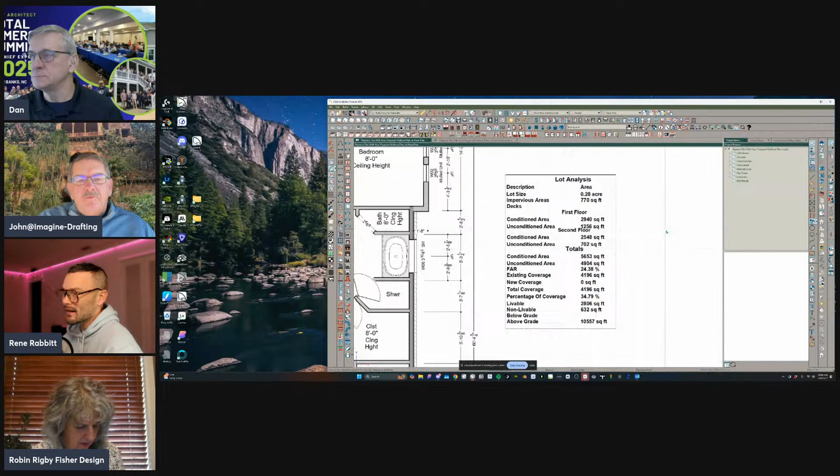There we go. It should work just like this. You just start drawing and it produces this area analysis for you. So if I did a new plan and just drew out some walls, there's a few little cool tips and tricks for this, which is that it's meant to recognize any room type that has the word 'addition' in it. So if you're doing a remodel, this works particularly well.

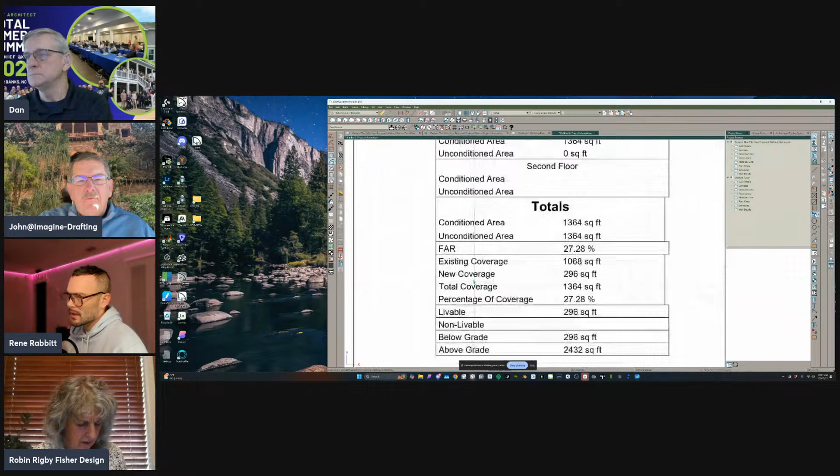Notice I put that as addition, and then wherever you're going to store the set of schedules that comes with this—in my case it's in a project information section—it's going to pick up that there's some kind of new coverage there from that addition. It gives you total coverage, gives you conditioned area, unconditioned area on a floor by floor basis.

You can format this for acres or square foot, for lot size. It even gives you a way to do impervious areas that's either driven from rooms automatically or from a polyline. And I have a pretty robust set of instructions for this too.

I actually took the time to write up instructions for once, which almost never happens. How to use it? I know, it's incredible. What a concept. But yeah, I know.

Here it is, the area analysis package. And when you click on it, I even give you an example download in case you want to just take a look at the install instructions and see if it's something that you think you can do.

Or you could pay me to install it for you. It actually comes—that's not true, I said it comes complimentary with install. I will install it for you. So I even give you a schedule link for installing it.

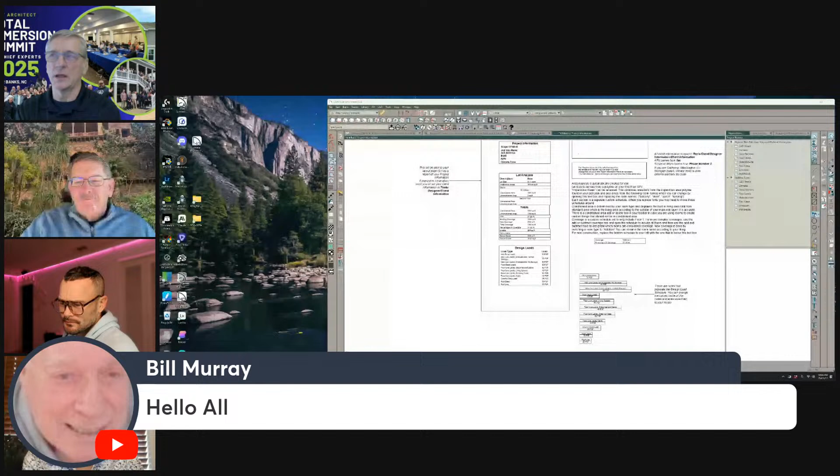So yeah, if you're trying to do automatic area analysis, go pick that up. Rene, you never cease to amaze. Nice job. So I'm sure you'll talk a lot about that at the summit, which is coming up. Chad's impressed. Ready for it, better go get it.

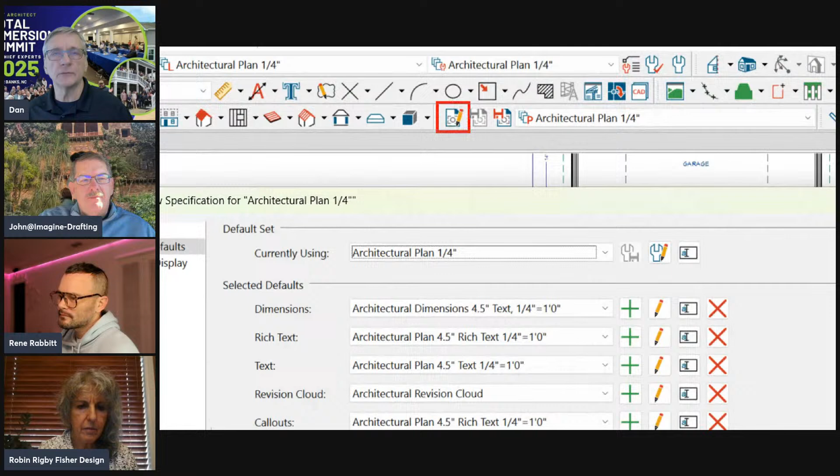So when I click on this little icon with the pencil on it, the edit the view icon, it's already named because I've named it with the plan view. I could change that name right now if I wanted to, but I'm going to leave that alone. And here's all the things associated with this view.

When I open the dialog for this kind of view, it's going to be different than when I open a dialog for a 3D view. So let's do that real quick - let's open up a dialog for a 3D view. Bring up an overview - all right, there it is. Now let's click that same icon.

You get a few different icons, some different things here now. So one of the things you want to get used to doing, and I do a lot of 3D views on my screen, on my plans, my finished plans - I do it.

Of course, you're going to do elevations, cross sections, schedules, area schedules, that kind of stuff.

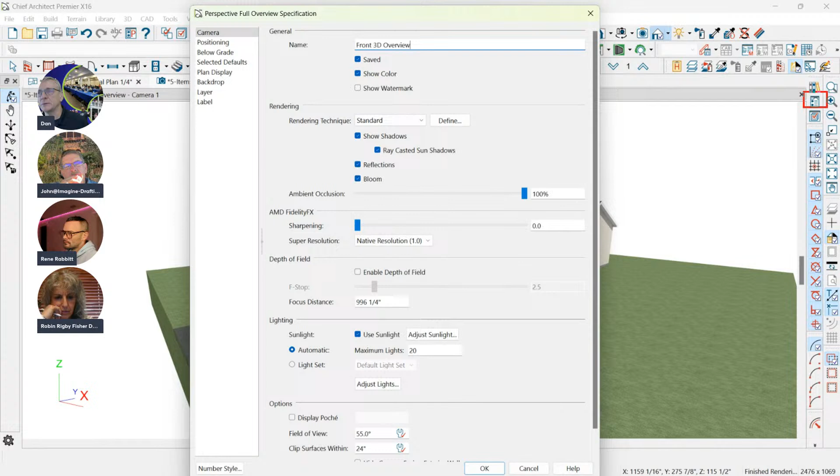So the first thing you want to do is name this. I'm just going to call this a front 3D overview. The reason I want to do this is because I want to be able to use my project browser to manage all these views I'm going to create. So I'm in a front 3D overview.

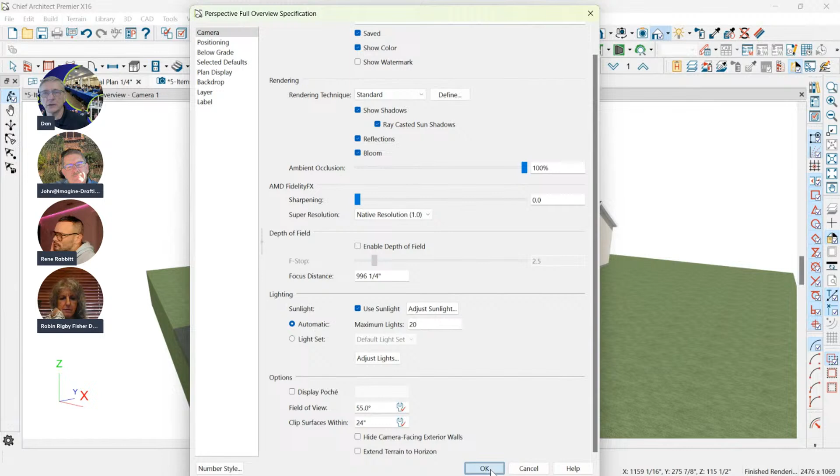Now I could go through and start editing some of these things. I could change the position of the camera, what shows up below grade, all of those different elements, change the camera style to physically based, whatever style you want to see this view in.

So you have all these functions that you could do with this particular view. All right, so that's cool, we could do all that. So there's my front view. I just changed it again - I clicked this icon and then I moved my camera. So now it's different than what I first started with. I need to be aware of that and then click this icon to save the new setting. So this new view is now locked in place here.

The other thing you use this icon for right now is to create different views without having to go back to the floor plan and drop a new camera. So I'm going to save this view, and Chief will automatically rename it something else, like overview 1, 2, 3, 4. You can change the whole name if you want to.

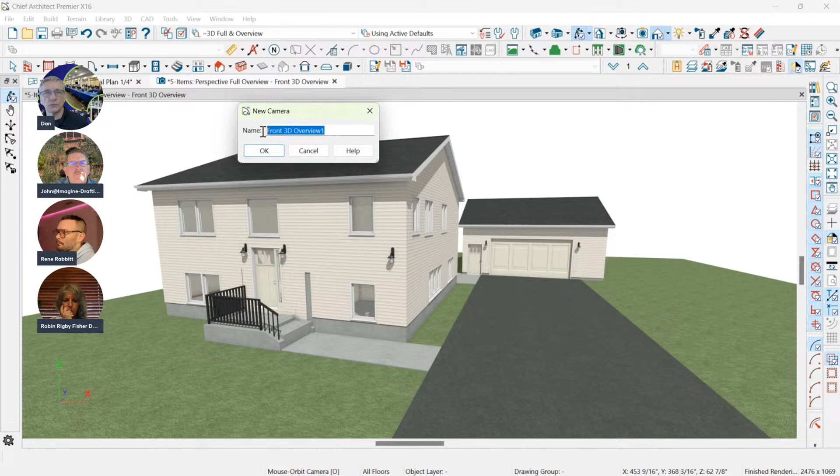Now I could go ahead and rotate this, and maybe I should have named it side view - I could go back to do that later, but let's save it. In fact, I could go to my browser right now and go to my floor, my cameras, overviews. There's front overview 1.

I'm going to rename this one right now, side overview - I'll call it my right side. It's just project, just keeping track of the things that you're adding in your plan all the time. Each time you create a new view, save it with the proper name and you're good to go.

Okay, so let's say I've made some changes here, I've rotated a little bit. Okay, I'm going to save that. Done. Now I'm going to make another copy of it - I'll call it my back view 3D overview. And yeah, good enough, and click OK.

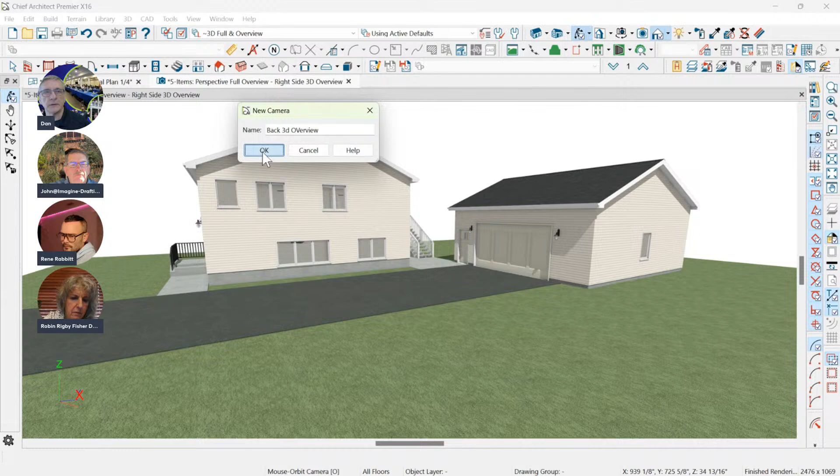Now I've got a new camera. I could rotate it like this, save the new position. I've just created 3 new views that I could put on my layout at any time. So on your layout, all you have to do is click on any viewport, copy a viewport if you need to, and then open the dialog for that viewport and change it to the listing that you have on here. And that's what will show up in that viewport.

Don, will you show which icon you use again to create it first? So once you open the screen up, where do you see it? So again, I'm in this view.

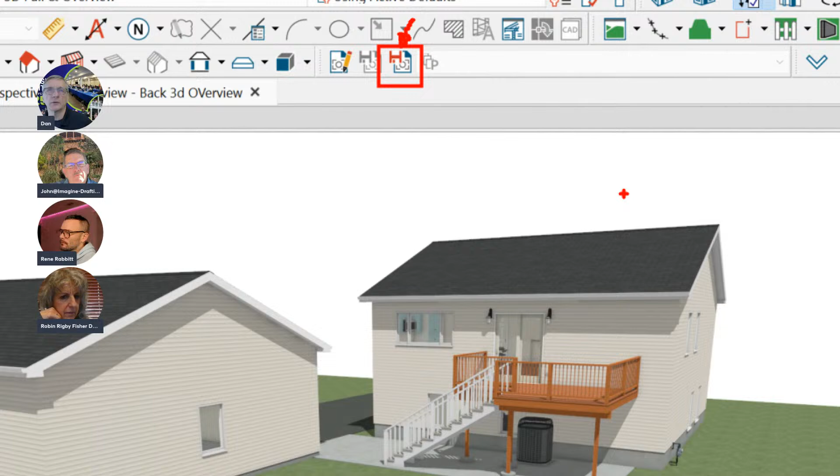If you notice, this icon's grayed out - okay, so that means this view is up to date and saved. Okay, so rotate your camera again. But to make a new one, I'm going to click the last icon here with a little diskette on it, for those of us old enough to remember what a diskette is. That's the save, create a copy of this view.

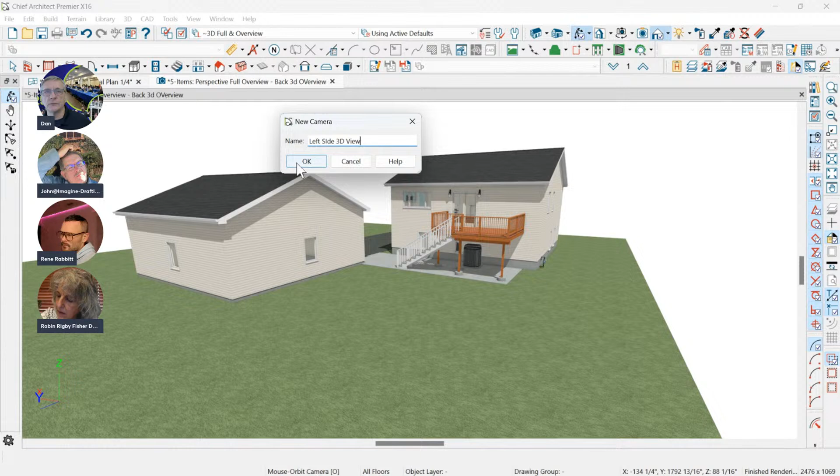All right, so I'm going to call this my left side 3D view. It's really nice to get used to naming all your views as you're creating them. If you're just opening a camera and closing it, don't worry about that. But if you're creating views that you're going to use on the final plan, name them so you can go back to them at any time.

And name them what you want them to say on your viewport on the layout, because you can use that automatic label - that's going to be your label for the view on the layout. So I moved this, now this icon is not grayed out, so now I have to click save. Done - I've just created 4 views. I could close this view now, go to my layout, and switch to any view here.

I created a new plan, not new layout. Let's go new layout, new layout. And I'll switch to a different page size.

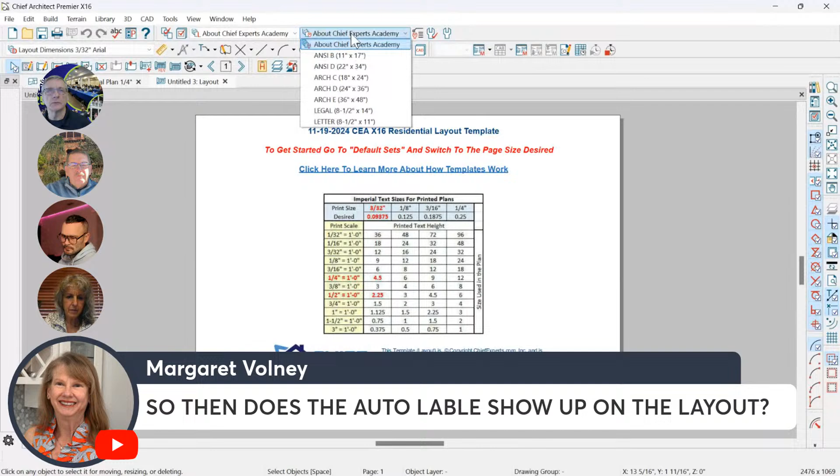Let's throw a viewport on here. I'll just throw my floor plan on there. I'll send that to the layout. Click OK. There's my floor plan, there's my viewport. I'll make that viewport smaller.

Okay, I can crop over that. Let's say, okay, I want to keep that view. And I'm going to create another view.

So I'm going to just copy, pull that view off, open its dialog, go to my linked view, relink it to something else. In this case, I'm going to go link it to my plan, my cameras, my overviews.

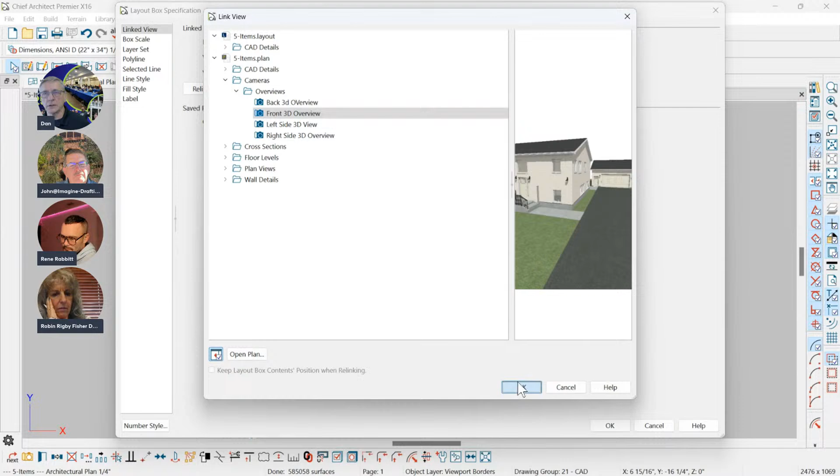There's those 4 views I just created. And when you click on them, it'll show the view right here. Click OK. Let's see, I'll do my front view there. Click OK. Click OK again.

It's going to populate that. A lot of times you got to click the refresh button, this little button down here to refresh the viewport. And then your view will show up.

If it's a camera, you have to do that. I don't know why they make us do that. It's a pain in the butt.

And then they need to adjust that in the viewport, or the, what do you guys call it, the view box or something? Layout box. Yeah, I still call it viewport.

And then I can resize that to be whatever I want. So I might have to go into the camera, reopen it, it's linked to that camera now. Now I could go in here, do it, save it, close it, refresh the view.

And Don, will you scroll in to show where the label shows up so that way Margaret can see that? And then you can turn that on.

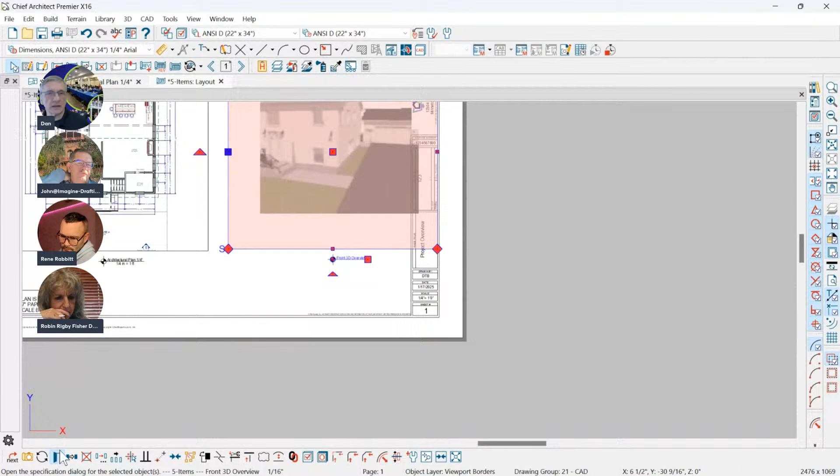Margaret, you emailed yesterday. So all you have to do with any of your viewports, any of your layout boxes, is click on it, open its dialog, choose what kind of label you want from the label. I'm going to use marker or callout.

So for your elevations and things like that, where you have a callout on the floor plan, this is view A, B, C, D, you want to use a callout. If it's a floor plan, use a marker.

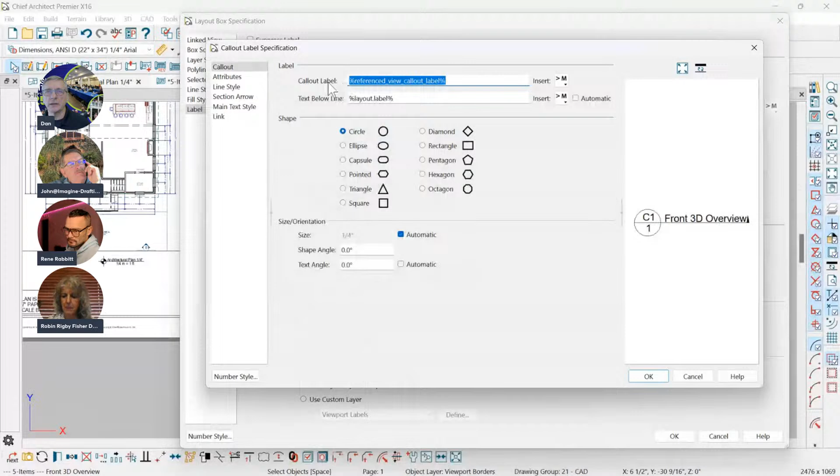So if we're going to use a callout, I'm going to go edit. I'm going to callout label. That's what I named this view. See, it says front 3D overview.

A lot of times you don't, that's the page number there. I'm going to get rid of that. I don't need that on this view. I just need the layout label.

Attributes, you can change the size, the spacing, section arrow, turn that off, click OK. If you want to have the scale under there, that would be part of an attribute, so you're going to put box scale. This is not a box scaled box, so I'm not going to do that.

And you're done. So that's your label. Nice. And then if I move this to page 2, so let's say I copy that and I go to page 2 and paste it.

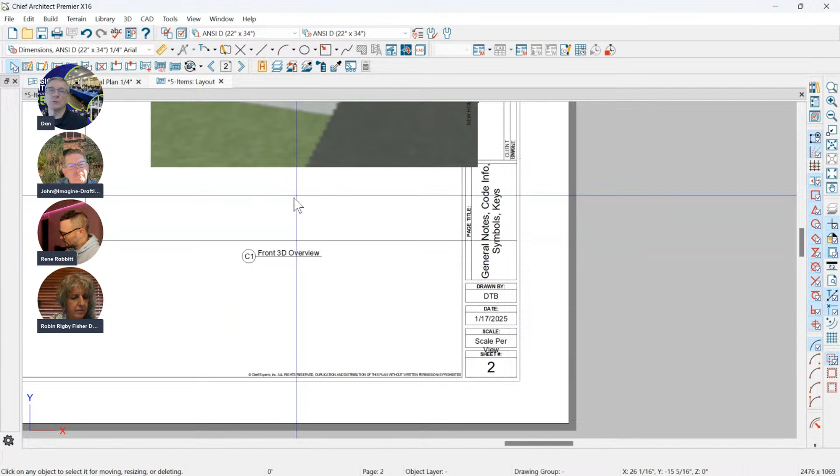Notice it won't put the 2 under there. If it's a floor plan or if it's a view that you have the 2 items, the top and bottom with the page number, it'll change this automatically. However, back on my floor plan, if I changed that view to something else, that label would update automatically.

So I hope that helps, Margaret.

You went way too fast. Let me finish my 5 points and we'll do it again. All right, I know. Actually, can I show something real quick, Dan? Yeah, go ahead. This is right on line with what you were just doing.

When we're making new camera views, and this comes up a lot in the Facebook groups, let's just say I've got, I'm going to turn on some electrical here. Say I've got electrical in one room, electrical in another room, and I only want to make sure all my lights are turned on for the room that my camera is in. So let's say I've got a camera now in this room.

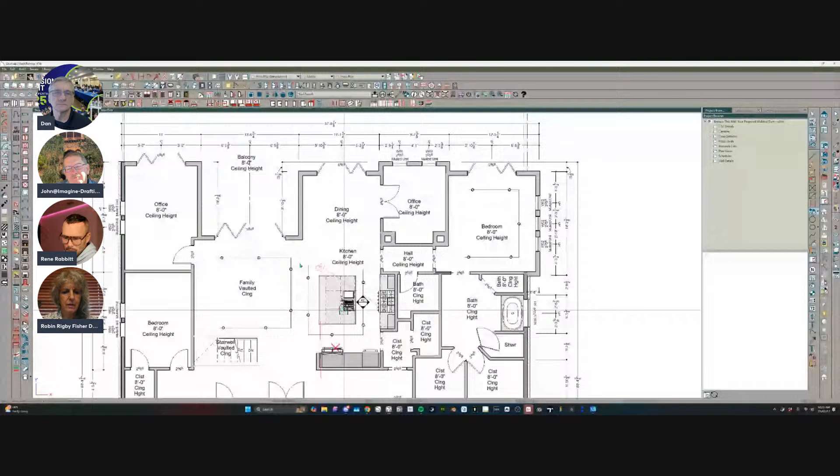A lot of times when people are building out these projects and they've got a ton of lights, they don't know why maybe one light is not turned on in their particular view. So if you are saving views for a particular view, we're doing the same thing that Dan was doing, which is save active view as, and making a new camera. And we'll call it kitchen camera.

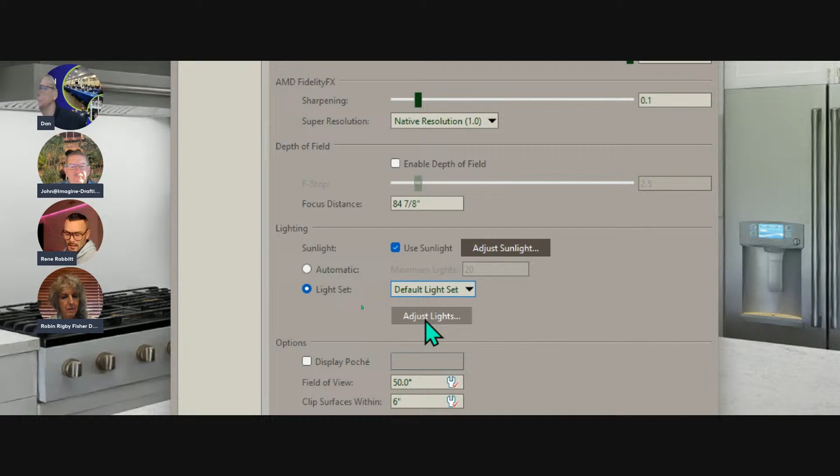It's going to open up a dialog box if I go to edit the active view. So I'm editing the active view, and in this camera specification, we do have the ability to make a new light set. This is so we're guaranteeing with our kitchen camera that we have our kitchen lights turned on. Instead of using the default light set, I'm going to click on adjust lights. I wish this said create new light set, because that would make more sense. So click on the adjust lights button, and here's where we can create a new light set.

And when we do that, we get to name it. So I get to say kitchen only. Typos. And then that automatically turns off all lights. Now I need to go sort by room, which you can sort just by clicking this. There's no feedback on that, so you don't necessarily know it does something, but clicking on these headings does sort by that heading.

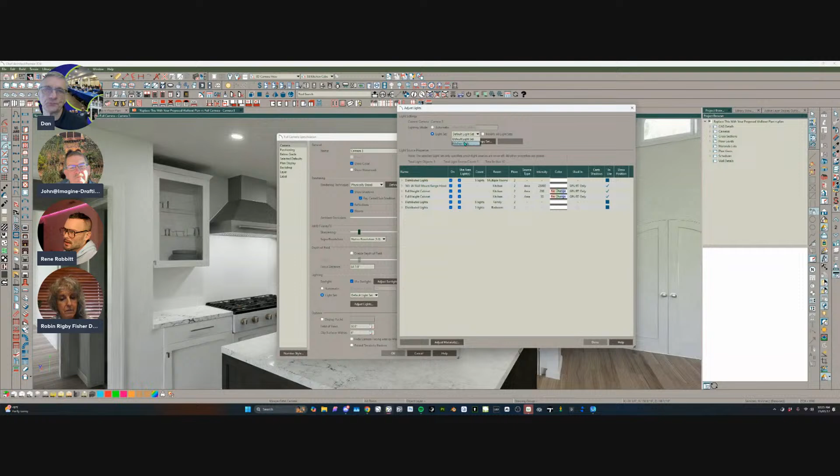So here we go, there's all my kitchen lights. I can group select them by holding shift and then selecting the lowest one in that stack, and then I can click on the on button. So now that's saying that with the kitchen only light set, everything's turned on, and with the default light set it's the inverse. So now I'm associating that kitchen only light set as the active light set for this view. Now I've got a saved kitchen camera where I'm making sure the kitchen only light set is turned on. Now I know these lights will be turned on the next time I open this view. Perfect.

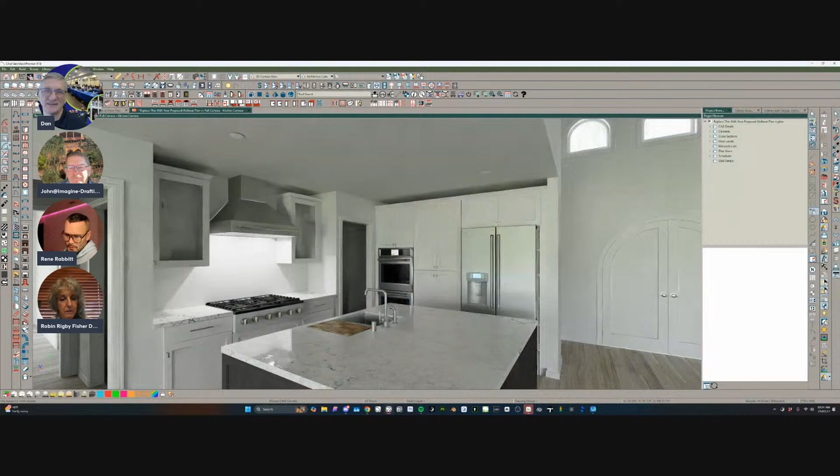All right, Dan, I'm going to put you back. Nice, I love it, nice. Yeah, Dan, we're back on your screen. She's gotten a bit better with all of that stuff.

So, where'd my screen go? Got turned off, silly thing. Hold on. What's going on here? Present, stop sharing, screen, stop sharing. There it is, it did stop sharing. Let's see, I want to go to this, about this, okay there we go. Thank you, so let me go back to my little presentation here.

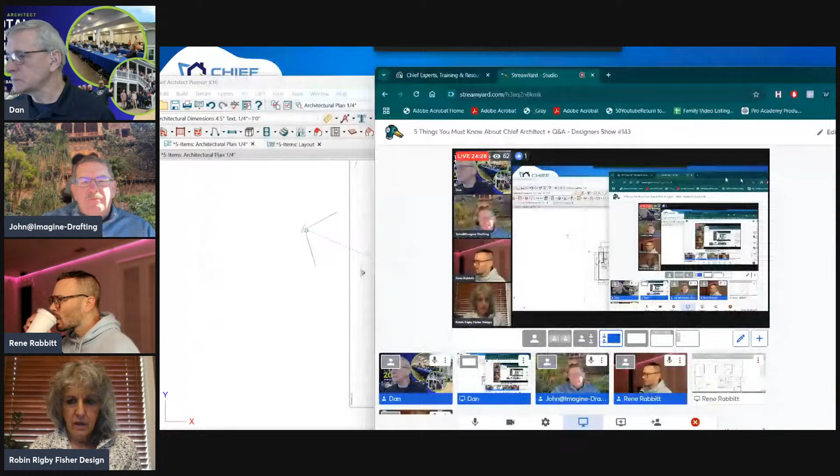I hope that was helpful for everyone. Someone mentioned the link viewport on layout. Never send a view to layout more than once. Someone taught me that, that was pretty cool.

All right, number two, using the project browser. I think I kind of covered that one a little bit already, but let's just go look at the project browser for a bit. So the project browser is that little plan management tool that you can use throughout the plan with just about any kind of things that you do in your plan.

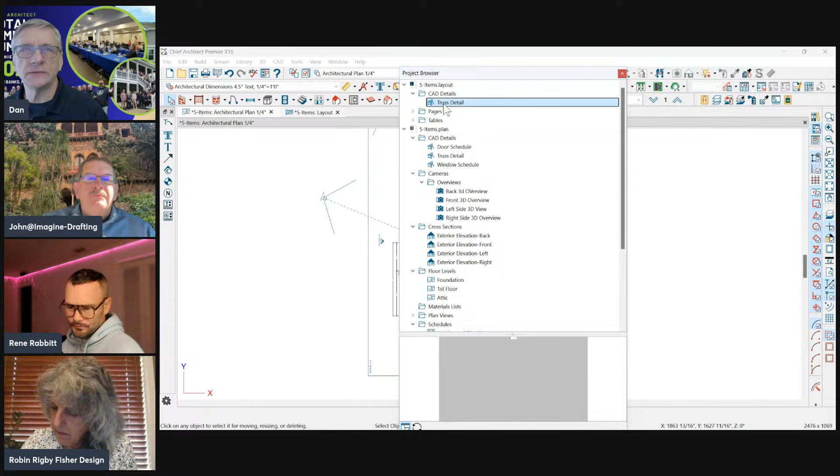So when we look at that, we've got our CAD details. Okay, so that would be, am I in the right thing? I'm on my layout, I don't want to be there, I want to be here. So here's my CAD details. Here in this particular plan, there's a door schedule, and you always get a preview of it down here. Truss detail, which Chief does automatically, and then window schedule. So I don't have much in my CAD detail.

That's if you go look at your program, that's this icon right here. This is the CAD detail where we can store different things that we do in our plan, like schedules and details and pictures and just about anything that you want. That's not 3D, it's all 2D stuff.

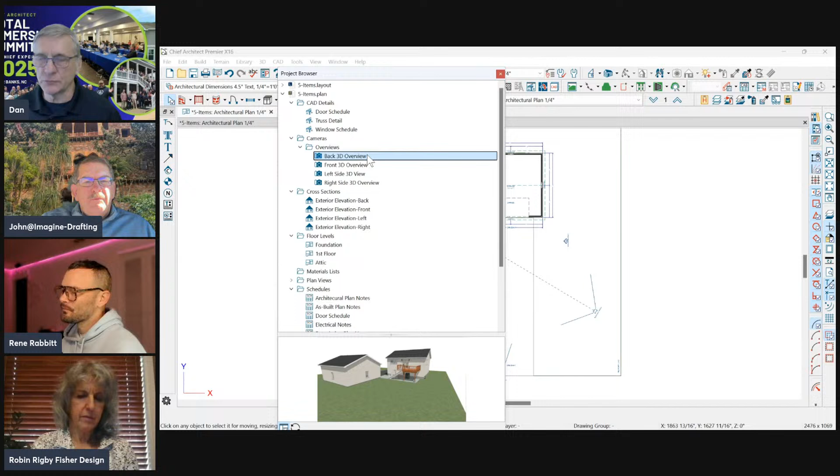Overviews, and again, as I showed you before, I want to rename that a little bit so it's up to date, so I can right click on it. Just again, get used to your right click button because it does a lot. I want to rename this and I'll fix the typo that I did here and get rid of my big V and put the little v, and good enough. So that's my new label, and that's what's going to show up on the final plan when I'm done.

I believe I can double click on this right here and open it too. So there it goes, so now I'm in that view. You can double click any of these in the project browser to open your view. It took me a while to get used to this.

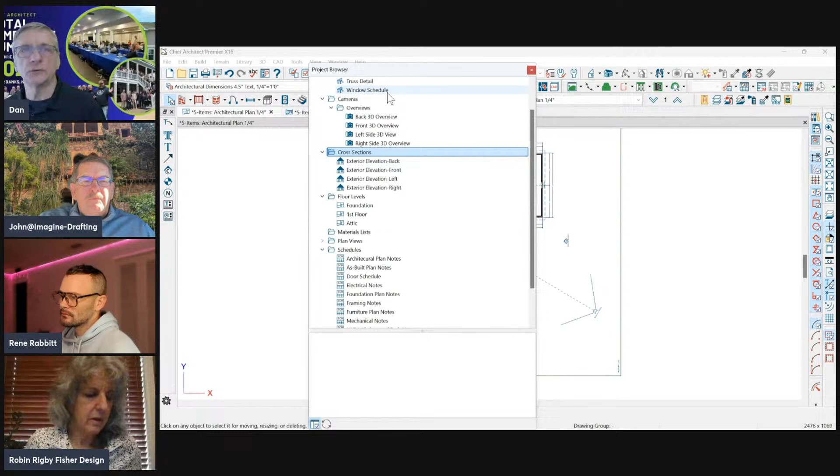Didn't realize all the functionality that was there. I'm not even sure when they added some of this to the project browser. But here's all my elevations - front, left, right. I could edit this view, which opens the same menu as clicking that little icon with the pencil.

Now I could change this - maybe I want to show a standard camera instead of a vector view. You bring up a good point. Now group select all those elevations - can we do that too? Yeah, edit all views. You can edit all of them to make the same edit.

It's not going to open a new one - see, it says no change. But if I want them all to be standard views, what if you wanted to put that back to no change? We know this trick - select no change. Oh well, they gave us no change back as a scrolling up option. That seems new, did that used to not be there? I don't think so.

That's a good trick, Rene, because sometimes I forget to get my labels on my viewports going. I can just go there instead of going to each page and selecting what's on the page. I could go here and select everything, get the labels on at one time. Okay, do this for me - let's do a test.

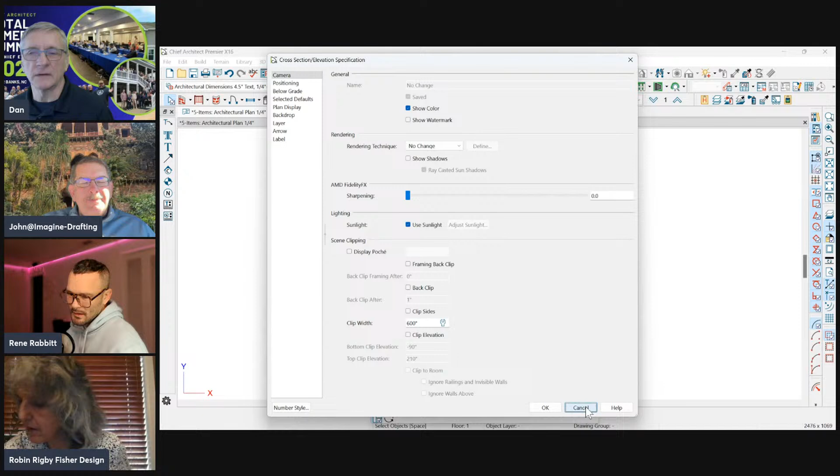Go hit cancel. Open one view, just edit one view. Change that 600 to 400 in clip width down at the bottom. Press OK. Now group select all four, edit all.

Now we got no change. Go ahead and punch something in there, and don't hit enter - click in like the 0, 0 or whatever just to commit that change. 800, okay. If you go back to clip width and type in N, just type N and tab out of it - no change, there you go. That reverts it back to no change.

Okay cool, or we can set it back. It was Dermot who told us that at the last training at Chief Architect. I missed that one.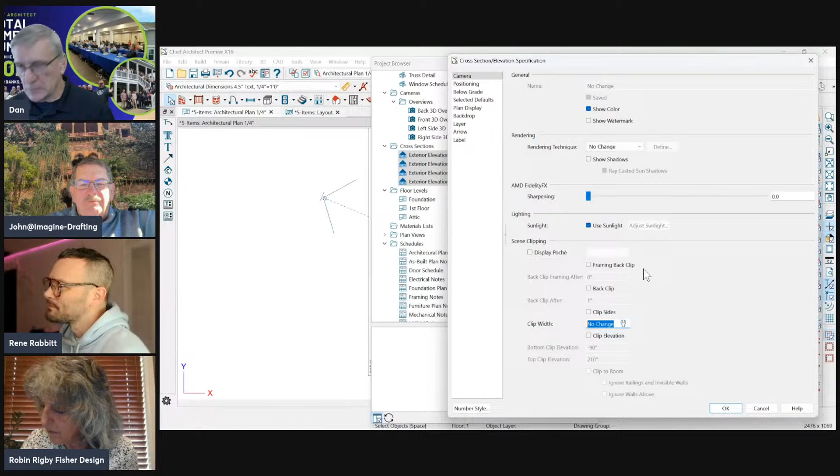All right, cool, so I also got another trick for you. Press OK or cancel here - probably cancel. If you're on a Windows machine, I know this works. Will you double click the project browser heading at the very top, where it says project browser? Yeah, double click that - puts it back over here in the dock side. And then undock it again - just double click again.

If you hit Windows key and left together - Windows key and L. Oops, what did I just do? Oh, we lost your window, your screen - it logged me out of it, put me into sleep mode. Oh, that's funny.

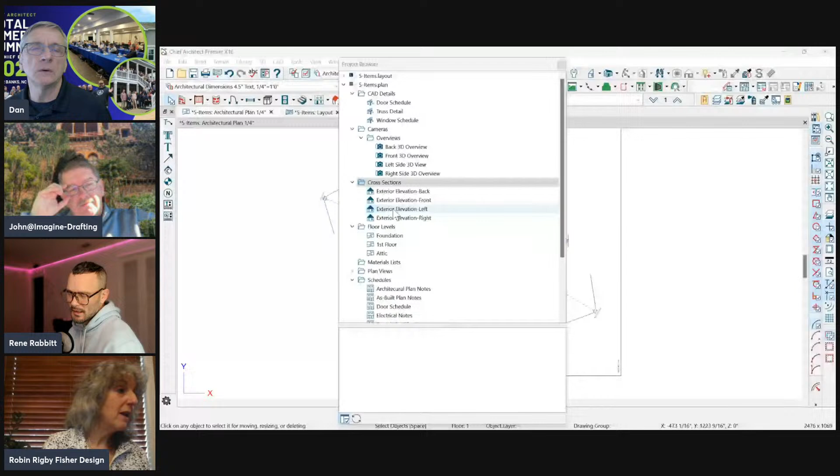That should have expanded that project browser to half your screen. Okay, let's see, hang on - I want to get back to this one. You must have a hotkey that overrides that. Are you hitting the left arrow or the L button? I hit the L button. Oh no, do window key left arrow with the project browser targeted. Didn't do anything? Oh, there it did half - so it made it half the screen.

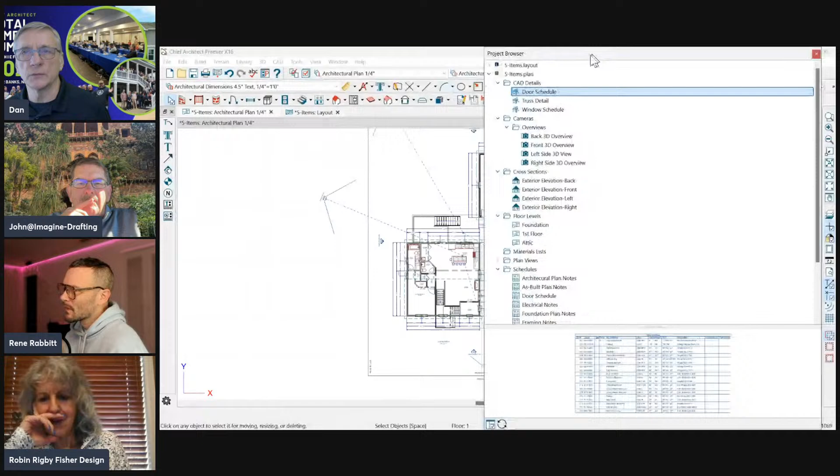Project browser - all right, what's number 3? Number 3, what is number 3?

Copying dimensions - you even asked about this one, Rene. Why would you do that? Yeah, I do this a lot actually.

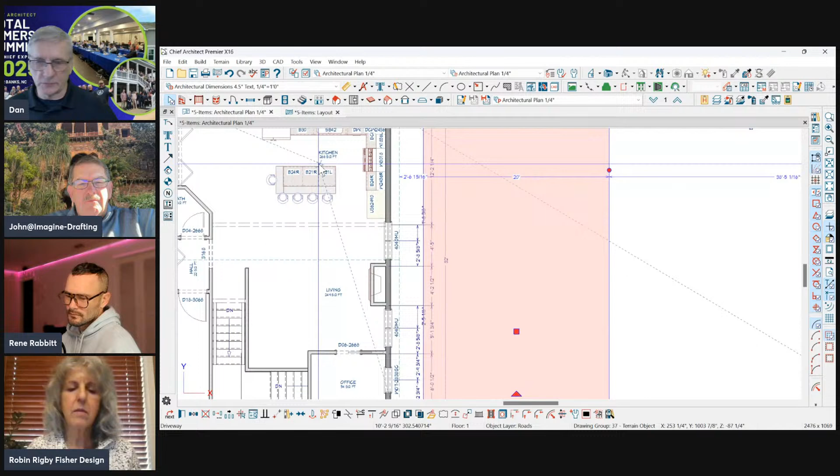Sometimes Chief only gives us 3 strings of dimensions when we do our auto dimensions - 1, 2, 3 lines. Sometimes I need more because I've got extra walls or windows. So a lot of times I'll click on my dimension, hit copy, drag it off, hit tab if you want to space it exactly 18 or 12 inches, however far you want to go. It's just like copying a CAD line. Then I'll add my dimension points back into where I want to go, and I'm done. I don't have to draw a dimension and move it around - just copy, drag it over, add your points, or remove points you don't want. I find that really easy to do.

So if I was doing these cabinets and wanted a full length dimension, I'll throw that one in first. Then I'll hit Control C and copy that because I want to leave that there, and just add my points in where I want them. It's easier than trying to draw a dimension because sometimes you get so many points you don't really want. I find this a lot faster.

Can you select more than one dimension line at a time to copy it? Yeah, I think so - it's just like selecting CAD lines.

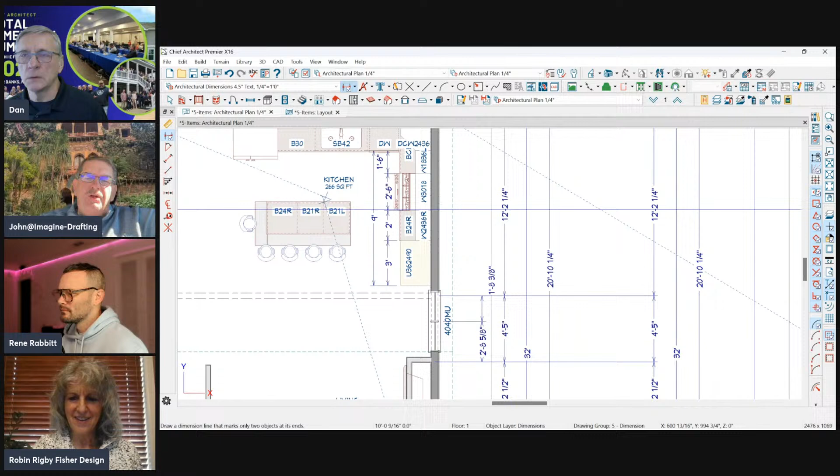Okay, now go ahead and put your 4th line in there and just pull it, then use the align objects tool to space them out equally. I'll just click on the ones I want to space evenly, then use align distribute - I want to move them horizontally and space evenly. Click OK, and that's going to put them all equally spaced.

Wait, show that button again. Okay, 1, 2, 3 - that's this button right here, down on the edit toolbar. And that will space all of them.

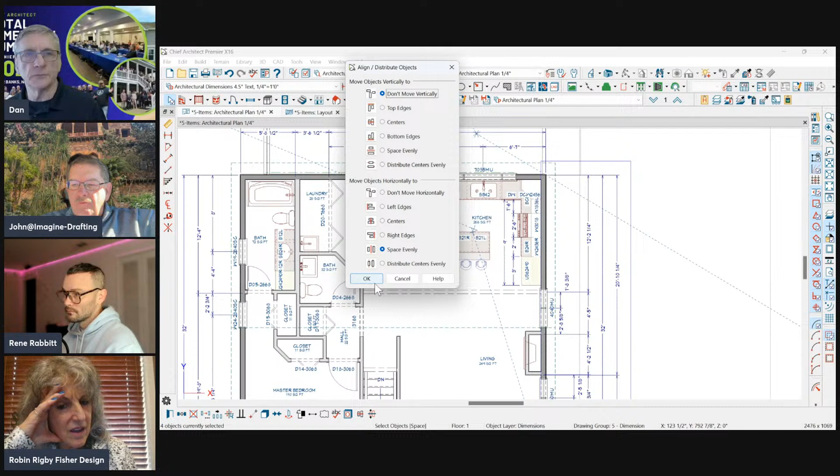You've got to make your selection here. I don't want to do anything up and down, just back and forth, so space evenly. I've selected this one here and this one out here, so now these should move in to be spaced evenly. Let's see if it works. And it did - but it spaced it evenly between this point and this point, so it just put the other two equal. If I wanted to narrow this up quite a bit, I could just go like that and then hit space evenly.

And your witness line should never touch your drawings. The only witness line that's supposed to touch your drawing is your center line. So what's a witness line? It's the line that goes from the dimension line to the drawing. The dimension line is the line with the measurement on it. So you have 2 lines.

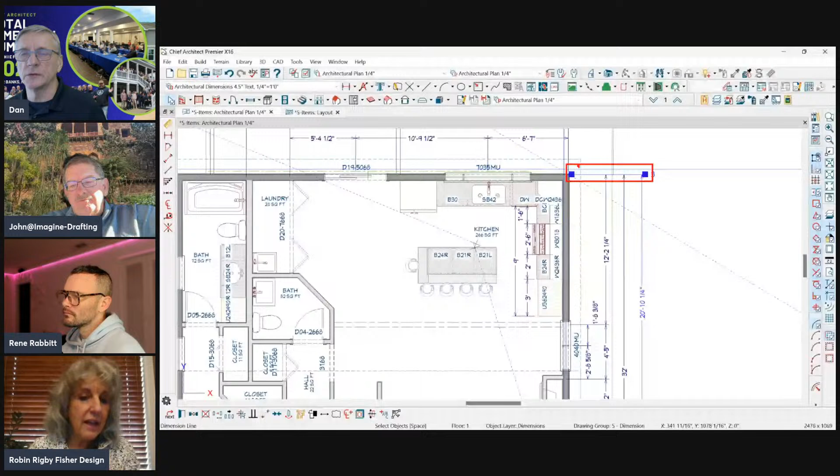Chief calls these extension lines - that line you have selected is called the witness line. The dimension line, the one that has the dimension on it, is called your dimension line. Your witness line should never actually touch your drawing - it's supposed to be like 3/16 of an inch off. I think that's the way it's basically set up, and that can be changed. Unfortunately, Chief doesn't do that by default, so sometimes you do have to modify it a little bit. I have issues with that on occasion.

Everybody does things a little differently nowadays. Technically, the only witness line that's supposed to touch your drawing is a center line of something, where it goes over the object you're dimensioning. Chief calls those extension lines, and that's something you can set up in your defaults - called extension markers. You can set the length away right here in your defaults.

Or I could uncheck it here and change that. If I go away from the defaults, I could change those - let's make them bigger, away from the object. The line I just selected, we won't see it because I've got these other lines here, but that should be 6 inches away now, right?

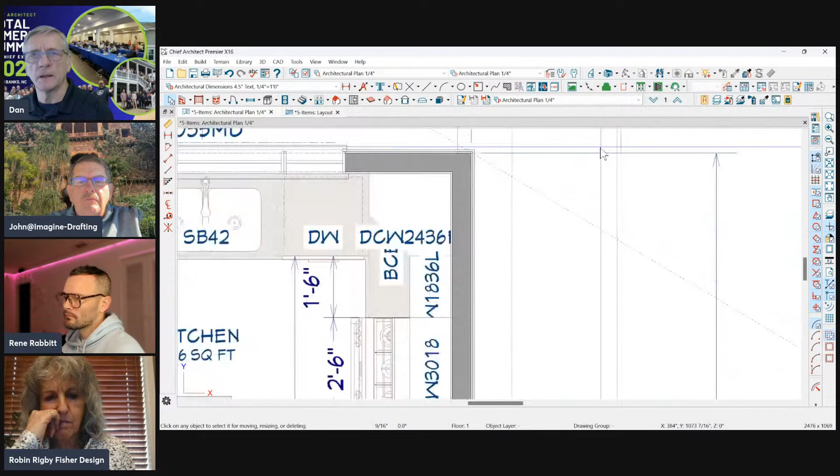It is. What else is going on? There's something else—do I have an extra one there? It's away from it, isn't it? Oh, there was a line there. That's what it was. So we were seeing this line underneath there, but now it's 6 inches away. You can set those up.

You could do that independently too with each, or you could do it for the whole as your defaults, or on an independent line. And then you could set those up in your defaults originally, like you just said. Good. And then it's all set up for you.

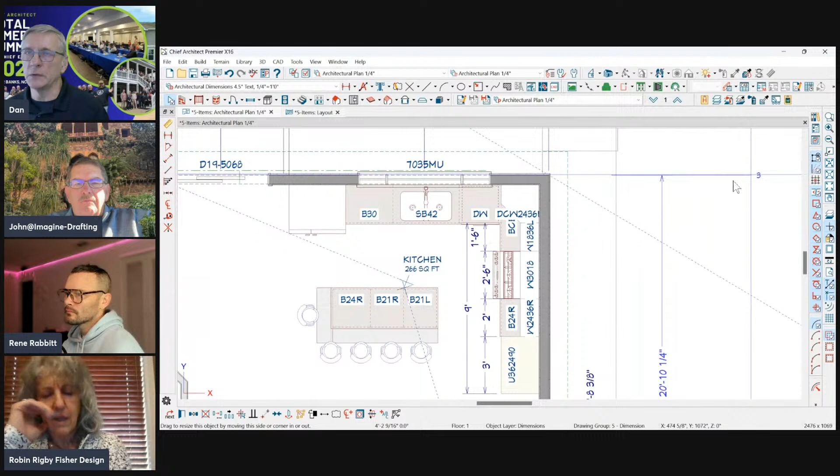But it depends upon sometimes where you're dragging your dimension from, that sometimes it won't. You still sometimes have to go through and manually change it on a specific dimension line. So that's a matter of not clicking the dimension, but clicking on the witness line, the extension line. Then you can move those in and out all day long. It just depends upon where you pulled the dimension from, that sometimes it does that.

All right, so that was number 3. Let's go to the next item.

Edit area. Edit area. What is edit area? How many people use edit area? I use edit area a lot more than I thought I would, but I do.

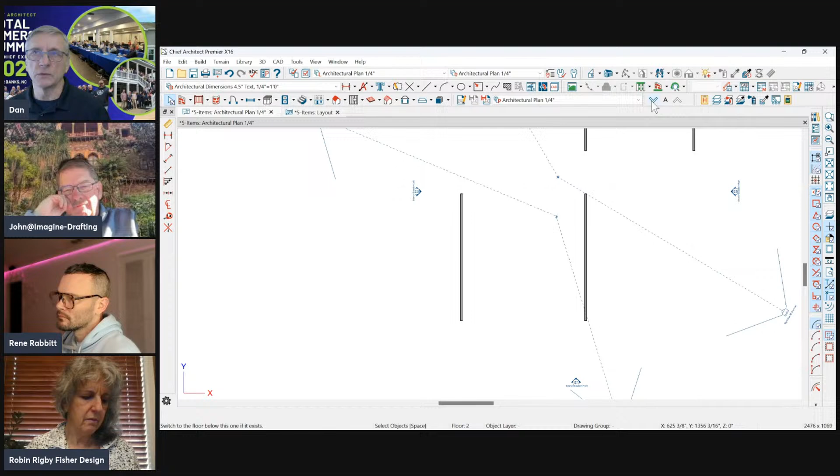So edit area is the ability to take any or all items in your plan and copy and paste them somewhere else, and move them. You can move them as a group. You can delete things as a group. So I've got a multi-level plan, a foundation, a first floor, but no second floor. Let's say I wanted to expand this house 2 feet or whatever. I'm going to add 2 feet to the left side of the house.

So I usually just draw a box first to where I'm going to select. I could even select, because I want to move this window too. So I'm going to break this box and move it around that area. I'm going to move this pink area, this whole area I've got selected, over 2 feet—this could be an edit area. And I'm also going to move my foundation 2 feet, so it'll move.

You guys are probably hearing my dog there. You need to mute yourself, Dan. I think I do—I'll just, you guys can read my lips, okay? Someone must be here, hang on. I'll go check, my wife is gone right now, so bear with me one second. You guys chat amongst yourselves.

So if you haven't been using that edit area button, try it out, because I was online with somebody the other day and they wanted to take 6 feet out of their house, and we did it in a matter of 5 minutes or less. It probably would have been less if I hadn't been teaching them how to do it at the same time.

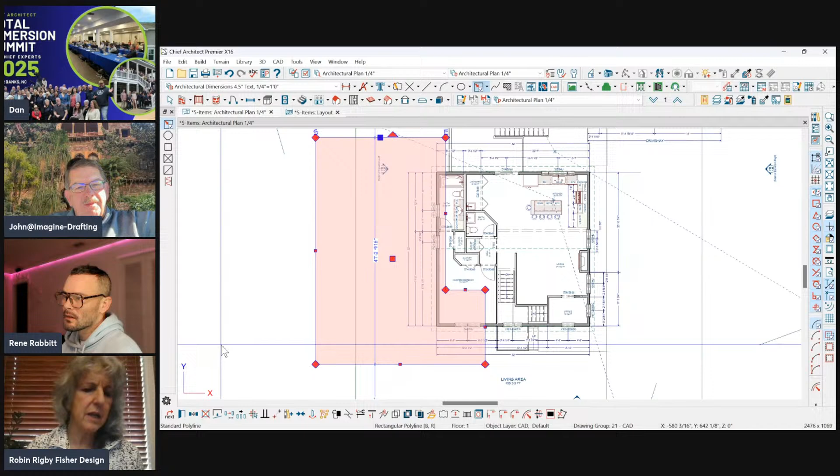Yeah, Dan's copying that CAD box down to the lower level so that way it can move all floors at once. You can even use the line tool and do a bunch of weird cuts—oh, the joy of home office, nobody there. And you can take this and then use the edit area tool, just visible or whatever edit area. Now I can actually move this, and it's going to stretch a lot of those architectural components out.

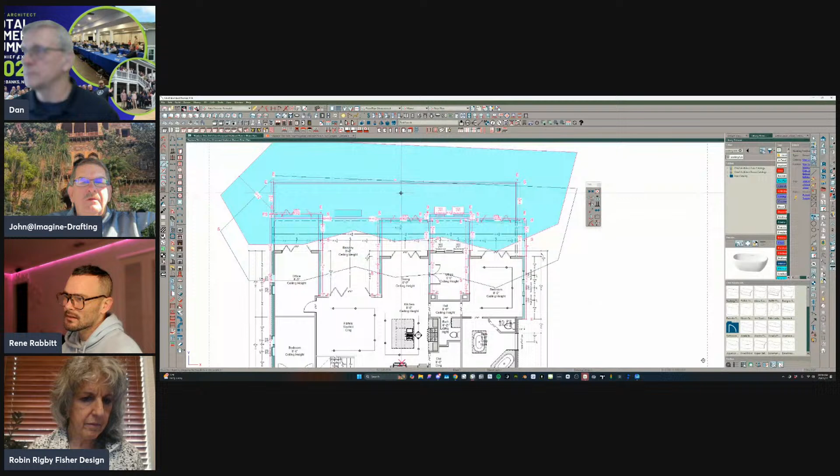Will it move both floors at the same time? It can if you do all floors, edit area, all floors—it will. So is there a button when you hit edit area? It's one of the other options. In edit area, there's a drop down menu, and you could select all floors. Yes.

And then you can edit everything at the same time. Will the dimensions automatically change? There's a difference between edit area and edit area visible. Edit area is going to pick up anything architecturally that might be on those walls, as well as light fixtures or whatever else that might be there that's not turned on in your active layer set.

Will it get the furniture, or the wall, the roof, sconces or anything? Yeah, it'll also get the roof, anything that's in the structure, the roof, everything. Got it. And then if you do all floors, it does everything and it redimensions the whole program for you.

Yeah, that's what we're discussing right now - if you hit edit all floors, then it will move everything at the same time. Correct, and you can even use it to reflect a drawing.

I would say that I have noticed that it makes a big difference if you make sure that your building is at a 0,0 mark, center 0,0 mark, if you're going to do something like reflect, because that makes a big difference in some way, and I can't remember why.

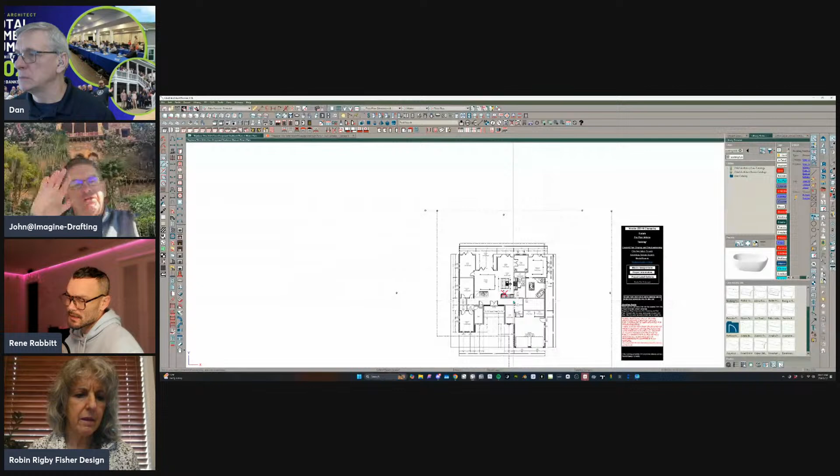You're talking about just the math involved. You're talking about starting your drawing from 0,0. No, I'm saying center of building 0,0. I know that makes a difference when you're going to reflect a drawing. Are you talking about reversing the plan, Rene, or reflecting it about something?

Reflecting it about something or reversing. Honestly, it's been a while since I've tried it. If it's reversing the plan, it's taking up everything that's on your screen that you've drawn on your screen. You could have the full extent of the box, 100 feet away, and it's going to reflect it over that whole thing.

That's what it was. Okay, so what I would do when I was reversing a plan is I would draw a CAD box so that it was reflecting about what I wanted it to reflect about - center - as opposed to full extent of the drawing. Instead of switching, I'd never used Chief's reverse plan tools. I'd never had much luck with those. Yeah, I just do a reflected copy, or not even a copy, just reflect it.

So if you want to flip a whole drawing 90 degrees, you want to put a CAD box around it and then reflect it. Yeah, and that way it just does what's inside that box - you're reestablishing where the center line is with that CAD box.

So then, according to you, what do you want it to be? Will it do all floors? Because that's different than what Dan's doing - he's reflecting. It'll do all floors at the same time - that does a whole entire plan versus what Dan's talking about, which is just an area, reflecting from edit area.

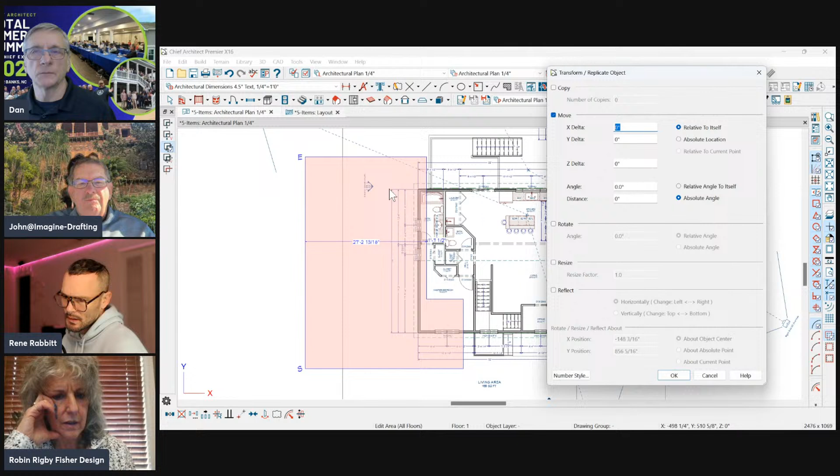Right, I'm just selecting an area. Now, it's not going to stretch that tub out, obviously, and I'm not sure what it's going to do with that door. We'll find out in a second, but it will move that whole window over because I put my CAD box around that. And so now I'm going to go into transform replicate.

I'm going to go X minus 2 feet. Okay, so click OK, and I've just added 2 feet to my building, my foundation, everything. There's a door there somewhere that's giving me a problem, but it didn't move the door - it left it where it was, so I'd have to move that over separately. It stretched the roof out.

Okay, so now if I had done it the other way, it would have moved the roof, but it would not have hooked the ridge back up automatically. I'd have to go do that manually.

So Dan, did you have to use transform replicate, or could you just use your tab key and tab it over 2 feet? Well, it wouldn't do the foundation at the same time if I didn't do the all floors at once. Plus I can't select items using a CAD box unless I use edit area. Okay, I get that - but then you did use transform replicate to move it over 2 feet.

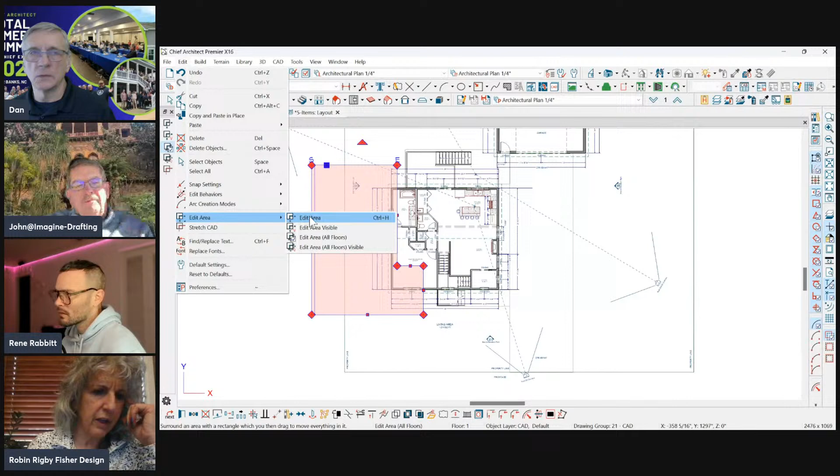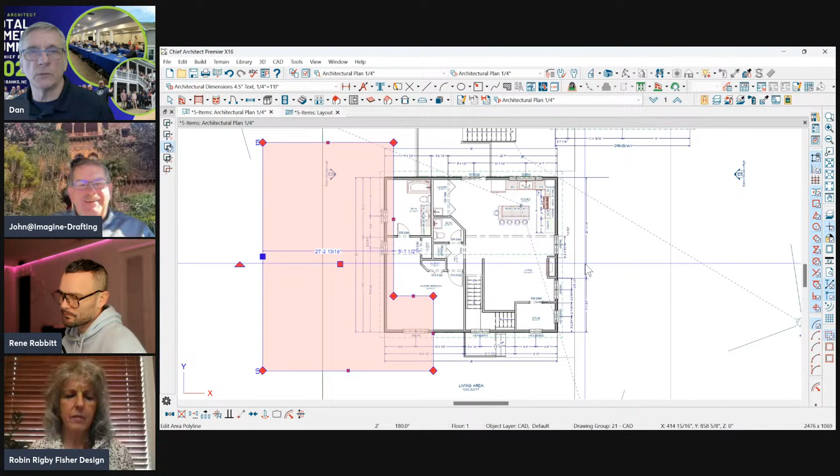Correct, I could have just grabbed the center handle of the box and pulled it, sliding over. I could have, yeah. Edit area, all floors, I could have grabbed that tab and moved it, see how you could stretch it out where you want. That's pretty cool, I've never done that before. So minus 24, hit OK, and I've just added another 2 feet to it. So yeah, any way you move anything else in Chief Architect, you could do that.

If you wanted to use your tab key to move it over a little at a time, you could have done that too. It's like magic. It's a CAD program. All right, so edit area is a cool tool. You can use it a lot.

I use it, if I wanted to create a duplex here, I'd define exactly where the center wall is. So I'm going to draw a line and switch this wall out to a double wall with sheetrock between it and all that good stuff. So I'm going to use this line as my flipping point.

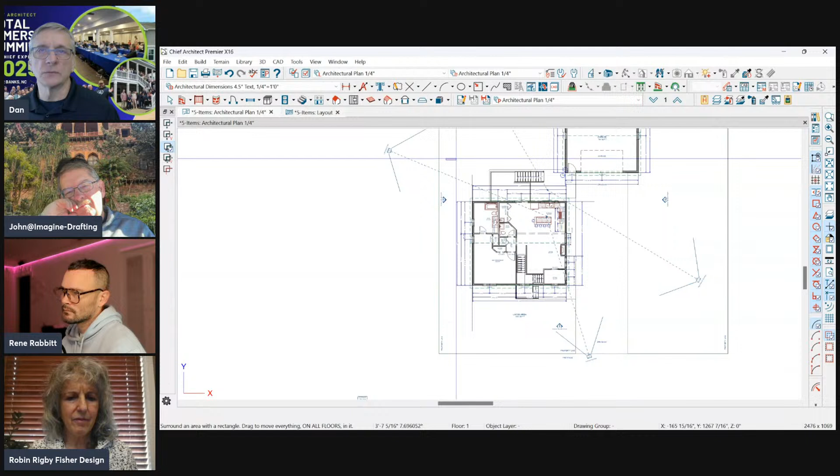So I just select edit area, all floors, select the area I want. Now, I can't get this - I don't want to flip my garage too. So let's use a CAD box before I do this. Let's get a CAD box drawn exactly in the areas, the items I want to flip. Just get those items. Now I could break this, my 3 key, pull that down. Now I'm only going to get what's in that box.

So copy, edit area, all floors, copy, reflect about. Okay, there's your reflect button. What do you want to reflect about? You're making a mirrored copy. I'm going to click on that line I drew, and there's the other half of my building. Now I would need to - come on, there it goes. No, something didn't work, did it?

Oh, you know what it is? I got to put this back here. This edge of the box has to be where it needs to be. Is that what happened? Let me hit undo. Undo, you lost that part of your building. Yep, something didn't copy, or did I click in the wrong place? Let's move this edge back here. And well, that's the terrain.

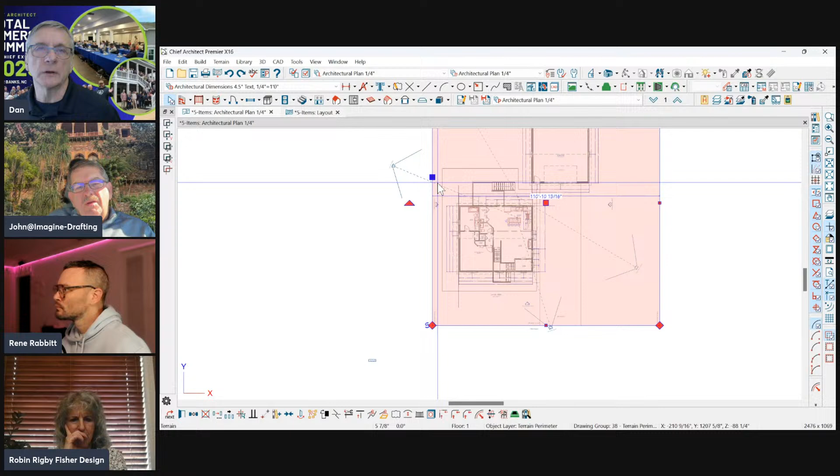Okay, let's think, that edge needs to be like that. It should reflect about the line no matter what. It should, I must have clicked on something wrong. Let me try it again. Edit area, all floors. Copy. Reflect copy, click on that line.

Okay, so here I'm getting predictive move now, I can see what it's doing. I must have clicked something wrong. But there's the other half of my building now. When I click, it's going to paste that.

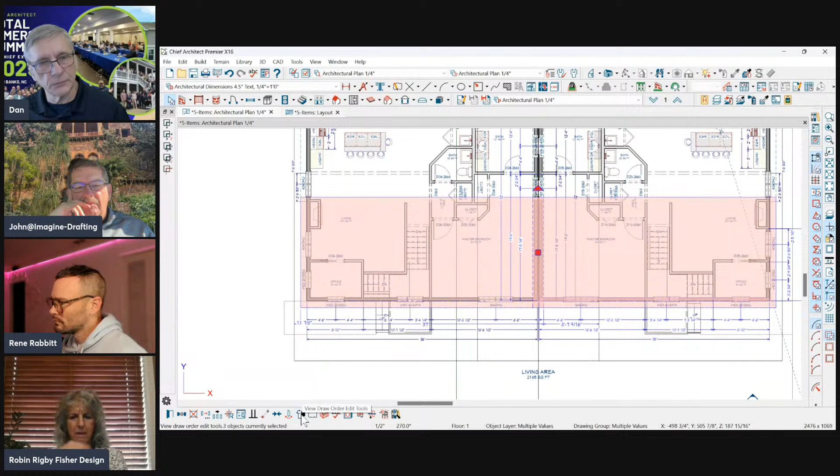I'm going to have to replace these two walls with the firewall and hook this together. And then I have to redo my roof because it's not going to create one big roof, it made a copy of the roof. So I'm going to have to join those together using the tool here. So I've selected both roofs. Now I could use this tool here to - no, that's not right either. I've got to get them right next to each other.

Now I can join them using this tool. Yeah, it should have worked, but it didn't. But I click this tool right here to make an outline of the roof, and it creates a new one. But there's how you create it.

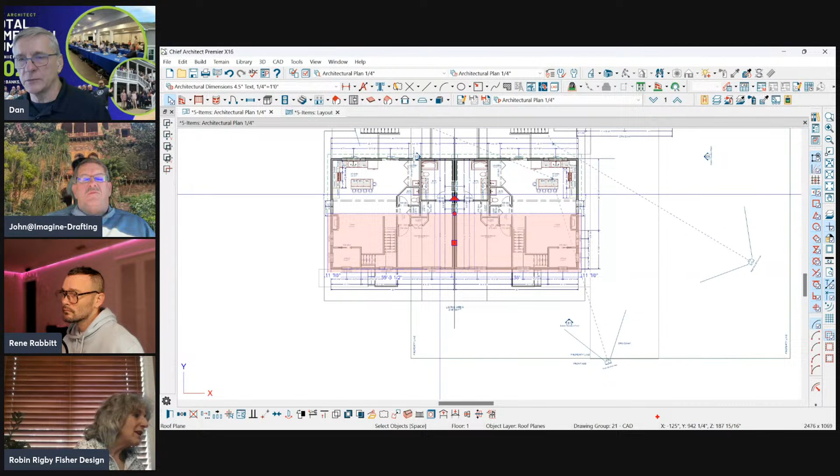So anyway, the bottom line is keep in mind you're in a CAD program that's got coordinates. Using edit area, you can copy something, or I could copy - if I did a room addition in one plan and I want to copy it to this plan, I might use edit area and then paste hold position back here. It's whatever, I'm not going to get into it any more than that right now, but edit area is a handy tool. It's there. Use CAD boxes to select what you want to move, and it really works well.

All right, let's keep moving, we're running out of time. Let's see, last thing I had on my list, and we'll jump back to labels for a moment.

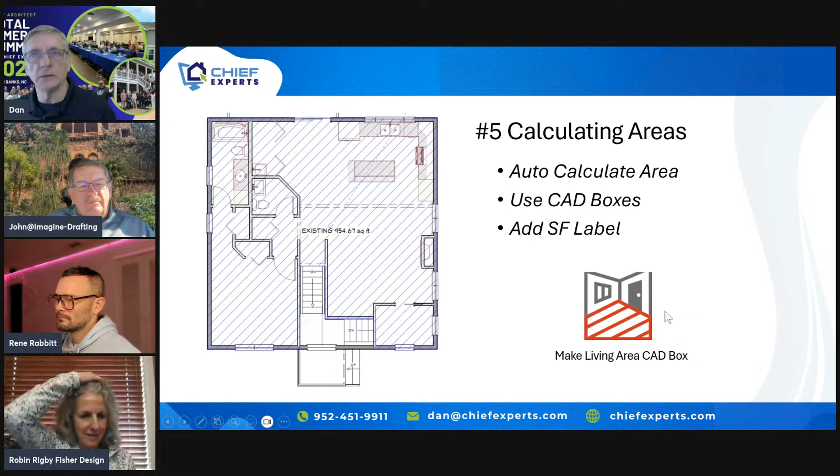Where'd my list go? It's calculating areas. Rene already showed you his cool new tool that you can get from Rene Rabbitt, rabbitdesign.net, I should say, excuse me. You could check that out. But what I like to do, let me just hook this together.

For simple projects, you just need to have an area. When you click next to a building, tab key, I click next to a building and I get my highlighter around that building. There's a little icon down here used to draw a CAD box around the living area of your house. So if you look at room names, you can have living area and non-living area. In this plan, the stairwell is not part of the living area. See how Chief puts the CAD box around there with dashed lines? That's not part of the living area.

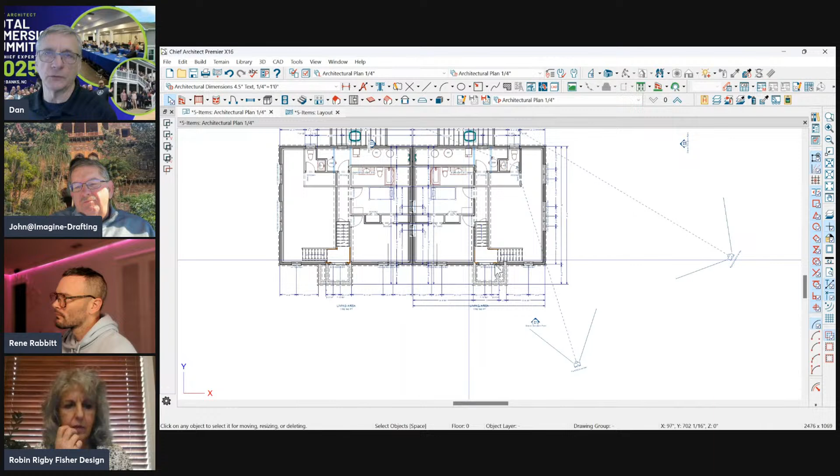It counts it on one floor, but not both floors. It'll count it on the foundation because that square footage is part of the plan. But here it's a hole in the floor, so they're not counting it as a living space. If you wanted to count that, I could go into that room and say, include that in the total living area, not exclude it. So that way my stairwell would also be counted as part of the living area.

So now when I do that again, this would be for the sale price, right? You want to count that square footage, not for the assessor. Just keep that in mind with Chief.

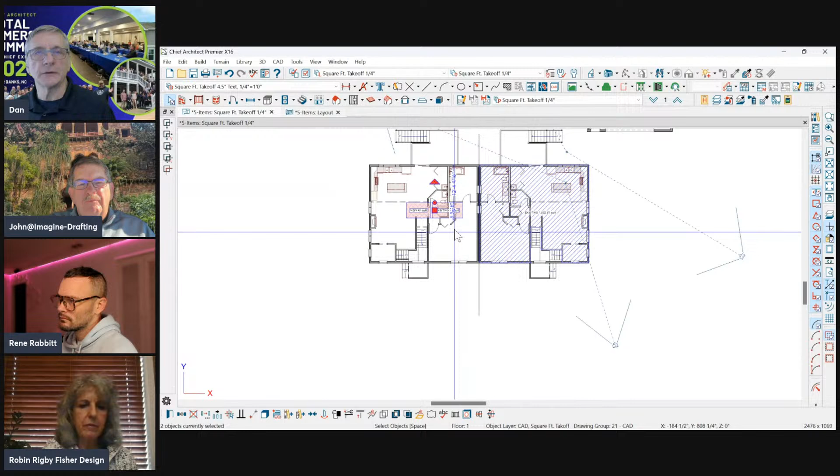In my plan template, I have a thing called square foot takeoff where I go in here and I'm going to create those CAD boxes. When I flipped this plan, it made a copy of that box that was already there. But a lot of times I'll just take these, and because I'm going to have different kinds of living areas, like here, I'll just stretch that over the top of that, and clean this up.

I'll get this mess cleaned up by connecting this line to that line using the connect line tool. Okay, now I've just cleaned that up. There's my square footage for that foundation. But now I want to do my garage.

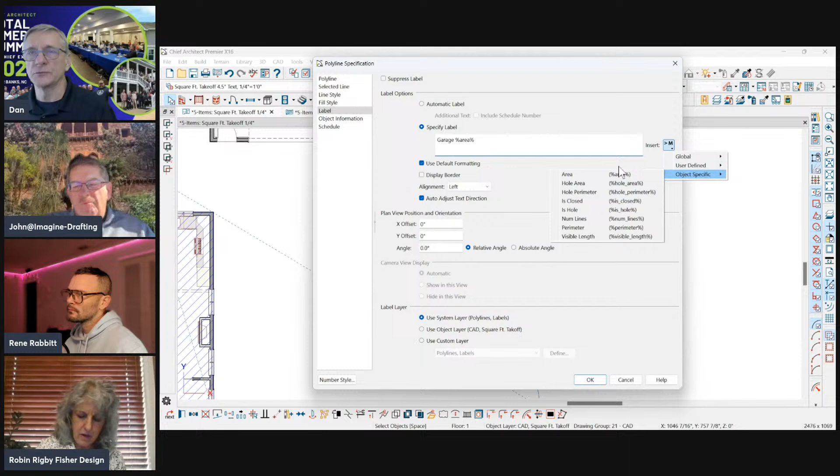In these boxes, I always just, again, this is the super simple method. I put the word existing. I use this a lot for remodel projects, so I might mark the existing house with this box and the new with the other box. But let's say this is the garage, I'm going to put garage. Then we use the macro area, object specific area. That's your macro. And then I'll just take that box and copy it up here and put it in place where I need to get that square footage.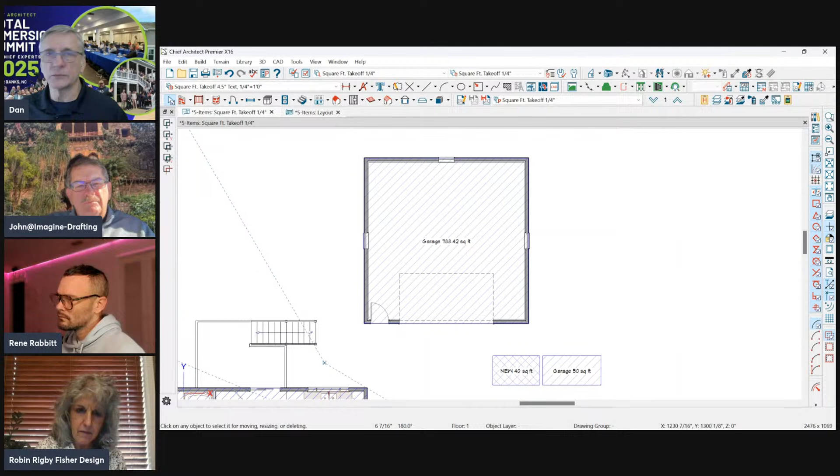So it allows me to get exactly where I want to call out the square footage for this room. That's what I would put on my list. I just have a little spreadsheet set up that I add those things to, and it works great for me. Again, if you want to automate that process and get all the different kinds of areas, go check out Rene's new tool. Very cool. All right, so that's edit area, using Chief's edit area and CAD boxes to calculate areas for things in your plan. Very simple to do. Any CAD box will give you a calculation of the area.

You guys have any other ways you do it? My system does it from rooms individually, and then we're getting more advanced from there, where it's doing some conditional checks for name of room, type of room, that kind of thing, different class. And then just knowing that you can do a room schedule and you can kind of delimit to create edit area schedules from there.

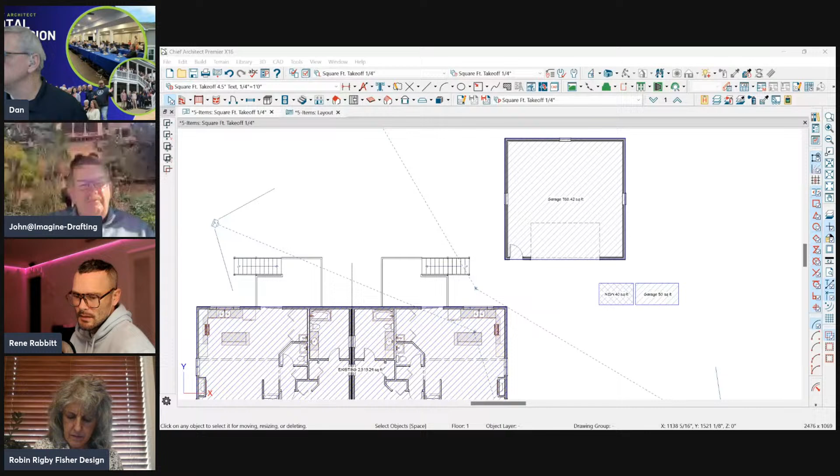Impervious surfaces and stuff. That one in particular is pretty custom in my system because it will use either a polyline that I give it, or it will use rooms that you name in terms of type. So you can say, anytime it's a deck, anytime it's patio, anytime it's porch, include that impervious area, and also include any polylines with the impervious area tag on it. Does it total up all the impervious surfaces, the house and the... Yeah, my screen. Here's my screen.

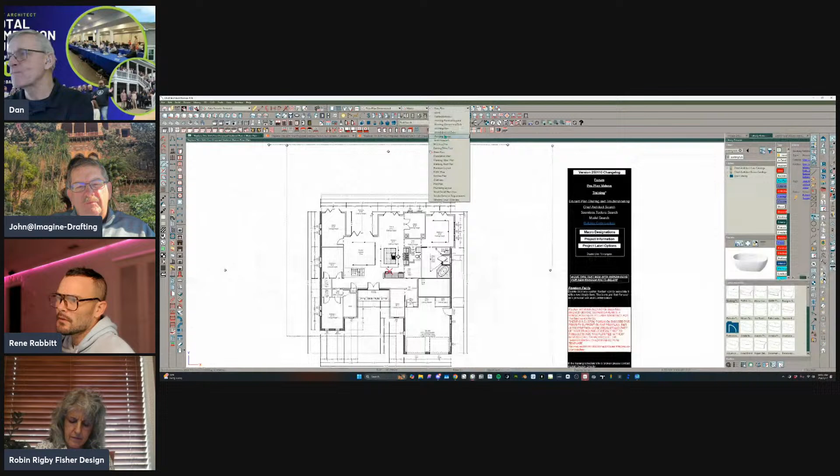So if I switch to a plot plan view, here's an impervious area polyline, and that's producing this. I just grabbed a slab instead of the polyline, but there's the polyline. It doesn't need to be a polyline, it could be an architectural feature, so long as it has the macro in it that's driving this.

And that's producing impervious area. So what's your macro look like in there, Rene? That one in particular is... let's switch back. In the label, it's just producing area and description, but in object information, it's F7.

We'll go to last view. Let's see, how am I doing this? I couldn't tell you. Never mind then, it does it automatically. That's all I know.

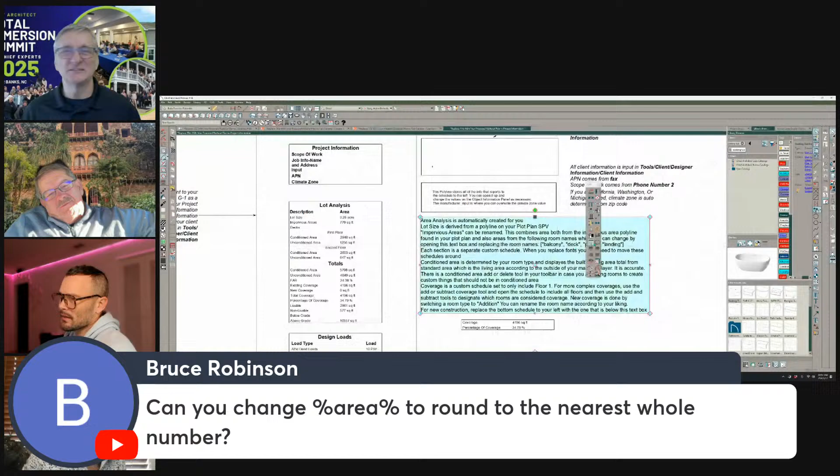And then on top of that, if I come into the lot information, which I have on my sidebar, it says right here that it's going to automatically include anything that's balcony, deck, porch. So if I change the size of my deck, that impervious area is going to change as well. It's just a conditional check that's built into the rooms.

Amazing, and it looks like you have it set to go to the nearest whole number. Yeah, hold on one second. Sorry.

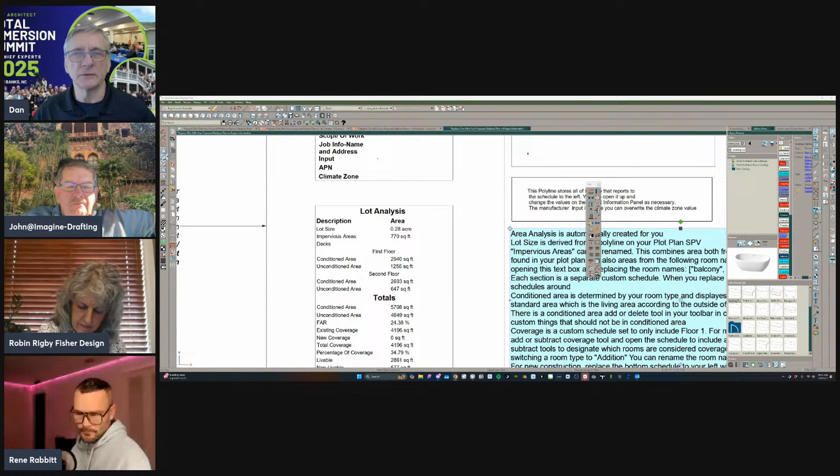All right, so we're going to go here and create an elevation for this kitchen wall. We're going to draw the camera facing the wall. Here's my elevation, click to the room. I'm going to click the little pencil icon, and I'm going to name this my kitchen elevation at refrigerator, or whatever you want to call it. All right, that's the name of this.

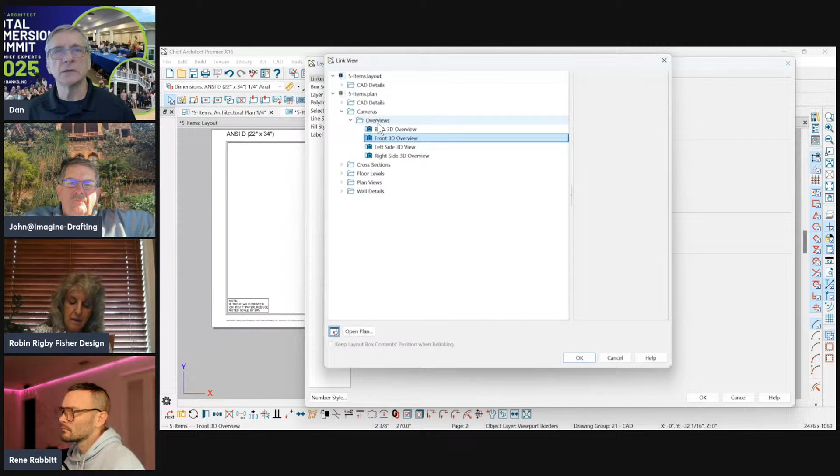This is the vector view, it's going to be a line drawing. Done. All right, so now I could either send that to layout, or I could go to the layout and replace a viewport layout box with that particular item. So I'm going to open the dialog for that. I'm going to go linked view, relink to, it's a cross-section elevation. Here's my kitchen elevation at refrigerator. Click OK. Now let's go check on the label.

Edit callout. We're going to use a callout on this because I need to have numbers that relate back to the floor plan. All right, so I'm going to go edit. And in this page, if you wanted to have page number as part of this callout on the layout, you could put that here, but you don't need to. So E6, because the page number is already on the page. The view is on the page, so you don't need to be redundant unless you want to.

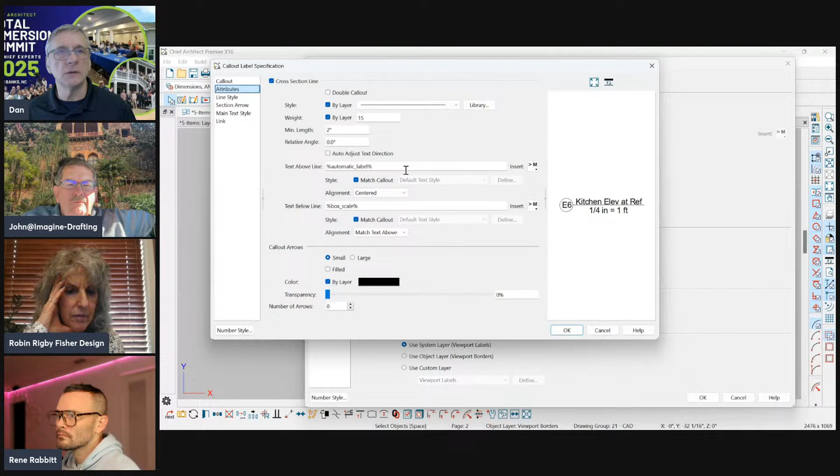You could do that. Attributes - I like making my text below line smaller, so I'm going to not match that, and change that to a different size. In fact, I'm going to change this to, I like 3/16 for that, and then I'll go 1/8 inch on the label below. And then I like mine to be toward the callout - again, personal preference, that's how I like mine to look. So that's how my label is going to be on my layout page when I click OK.

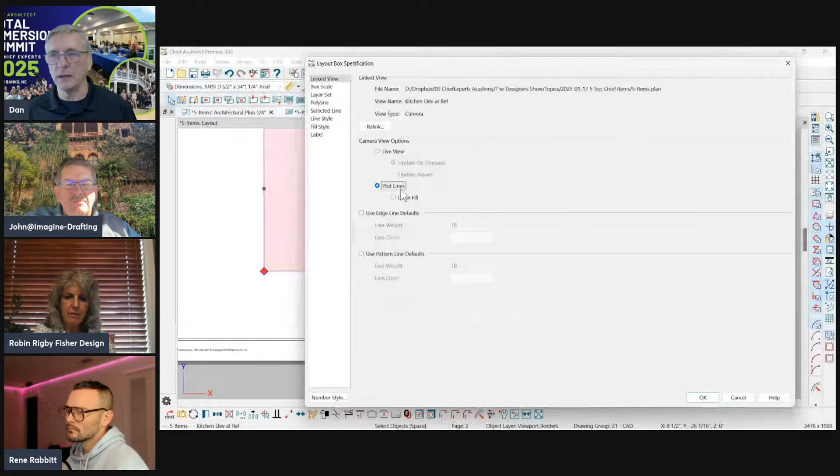All right, so I need to now open the dialog one more time because I forgot to set the box scale at 1/2 inch. And make sure that the linked view is set to plot lines. I'm going fast here, but live view, I don't know why that comes up as default quite often, but sometimes you got to switch back to plot lines - you want it to be a line drawing. So just switch to plot lines here, you don't have to resend it or anything like that. And now when I refresh that, it will be a line drawing, and then I just adjust my box around there. Use your right mouse button to pull the corners of that box up next to your view so you don't have to do one side at a time.

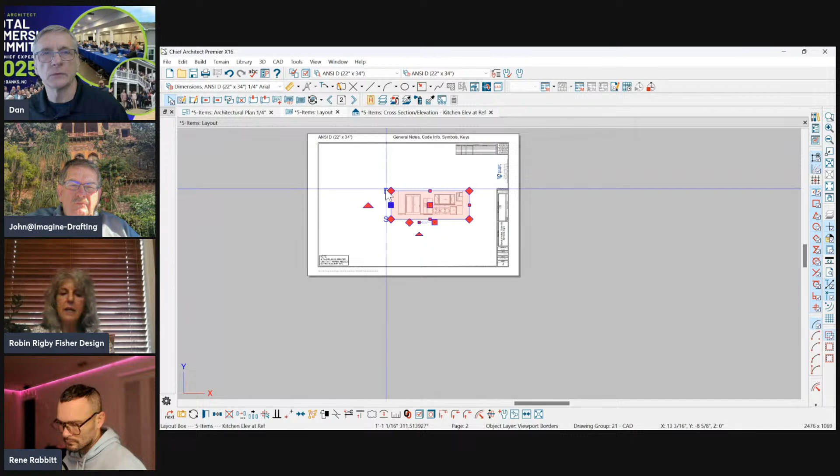Right mouse button on the corner does both sides. Or I could have hit the resize tool, which you get when you group-select something by holding the control key down—that's your resize tool. You do all 4 sides.

So there you go. There's your label, 1/2 inch, label number E6. You could change that number if you want to, but when I go back to my floor plan, that's going to say E6 on page 2. I'll switch to my kitchen plan and change the size of that callout smaller, so when I close that view, it'll show up like that.

So view number E6, elevation 6 on page 2—you could change that to E1, E2, whatever you want. The top number you can change manually. The bottom number you leave set to automatic, so whatever page it's on, it's going to be on that page.

Nicely done. That make sense? Margaret, you got it? Hope that helps. All right. And Margaret, look forward to seeing you in a couple months—Margaret will be at the summit.

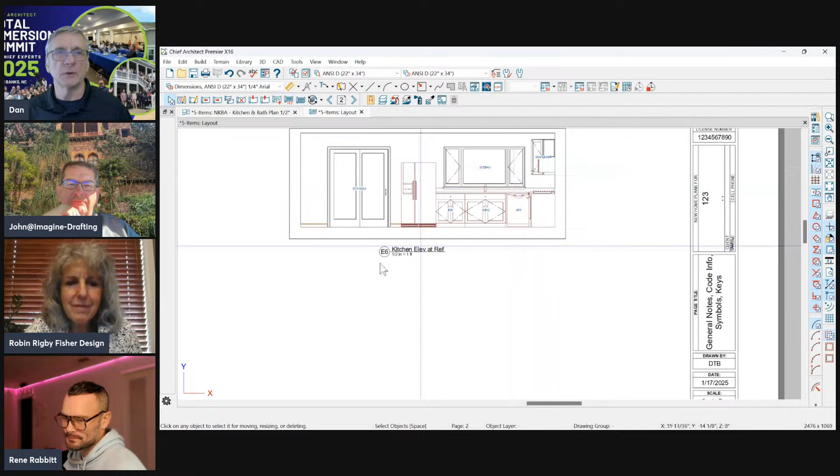All right, what else we got? Rene, you got something you want to show back in relation to Bruce, the area says thing—can you change area to round to the nearest whole number?

Yes, you can. You can put area.round, or you can do it a bunch of different ways depending on which way you want to do it. Let's take a look at this impervious area polyline, and in the label...

Oh, I grabbed the wrong thing again—one of these days I'll grab the right thing. There you go. I could do this a number of different ways. I could go area.round—we can even round it to 1 or 2 decimal places if we wanted to. We could go area.ceil, which would take it to the ceiling, and you could even go .round, which would round up in this case.

Floor would be the opposite—that's going to take it to the floor, .floor. Or we could even say to_i, which is an integer, which would be a whole number. And, oh, didn't look like it wanted to do that.

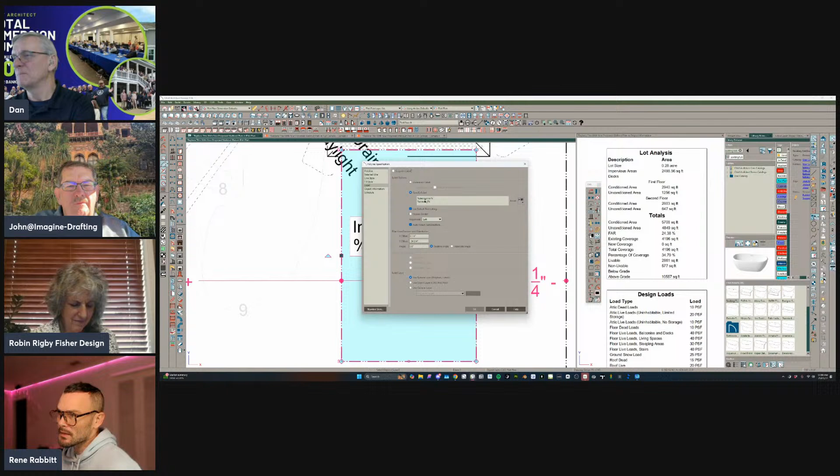That's probably because it wants to be a float first, or a string. Let's see—did that work? Yeah, to_f for float, and then to_i makes this a whole integer as well. There's a number of reasons you'd want to do that for scripting, but for what you're looking for, probably just .round would work out just fine.

You got any other questions about that? I don't think so.

So now I'm showing that I've got impervious areas here, 2498 square foot. If I tab through and drag this out, notice it picks that up—it's picking up this polyline, but on top of that, it's picking up any decks. So we're at 2,900 square foot right now.

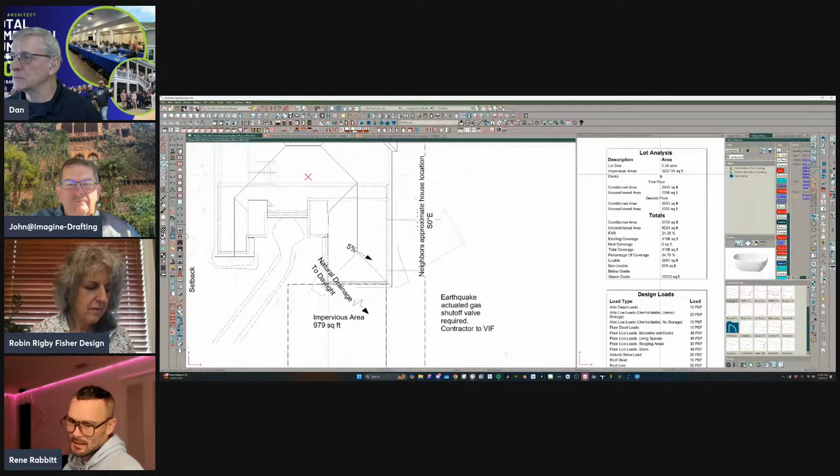It should be that if I draw out a deck—oops, which is a really funny shaped deck—there we go, it picked up that new deck as well. So this is a combination room and polyline that's picking up. Nice—these are all just individual schedules limited to a category, summing similar rows and grouping similar items.

And that's probably a little advanced to get into with -2 minutes left on the clock. We're over by 2. Thank you guys for being here today—appreciate it. I hope some of this stuff was helpful.